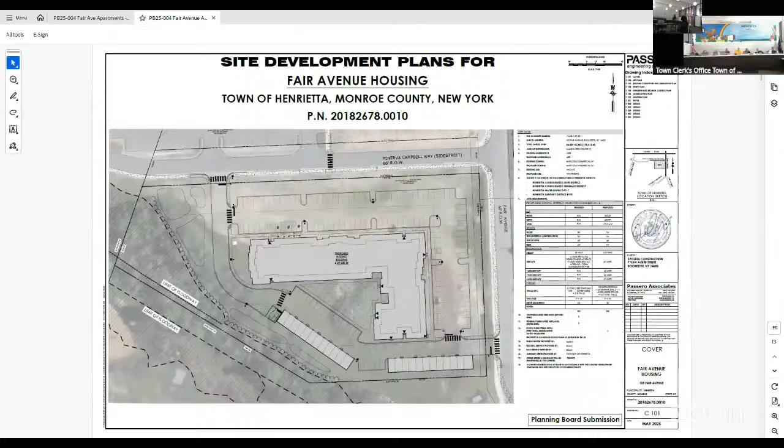One benefit of already having developed this parcel, we already know where a lot of utilities are. Water, sanitary are all in the right of way that we're connecting to. Stormwater on site as well - a very similar approach to what we did for the hotel projects, sticking the stormwater management areas along the west and southern portion of the building. Similar to those developments, it's a combination of bioretention areas to meet stormwater treatment, and then a deep pool to handle the actual quantity of the stormwater on site.

Eventually that all drains to the south and west towards the existing tributary on site. You can see that hatched area with the dashed line is the floodplain on site, so we're not proposing to impede on that at all. Obviously, it's a big point, especially right next to a tributary - we obviously want to avoid any impact to that as well.

As far as other portions of the site, we have a landscaping plan that went through review from the Conservation Board, which was received well. We have this vegetated frontage landscape area that will hopefully, when the trees bloom and get to full vegetation, provide a nice shield from the roads, and then also internal shrubs and grasses to really make the internal pop as well. There were some Conservation Board comments on switching some species out, which we will adhere to based on their comments.

As you stated, we did get comments from engineering staff, the fire marshal, and some other town staff. We went through those comments and supplied responses. No real deal breakers, I guess, just two things I'd want to bring up.

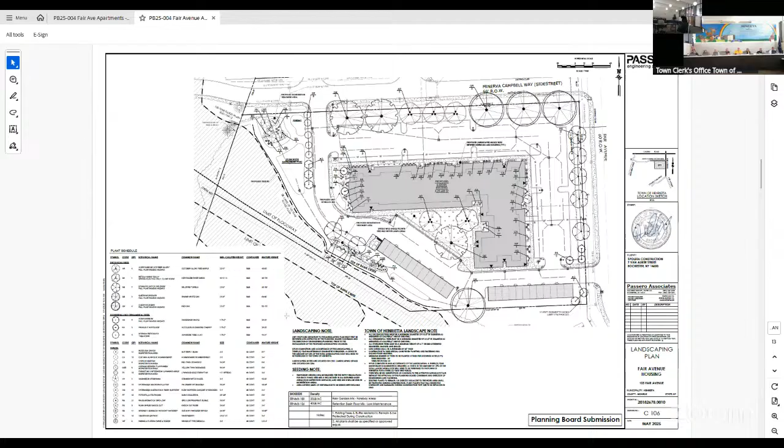What is on their property? The mast arm of the traffic light, the L-shaped mast arm that holds the signals, just where it's located, in the southeastern corner there. It's on their property, so that's kind of a negotiation and discussion with them to get approved. But as far as the design, layout, and everything, it's already been vetted through Monroe County DOT.

I think we'll probably just need one more refresher to make sure everyone's good with it. I know there's been some staff changes, so just making sure everyone's on track and moving that forward. That was a question on the status of that portion of the project, so I wanted to give an update in case anyone had questions.

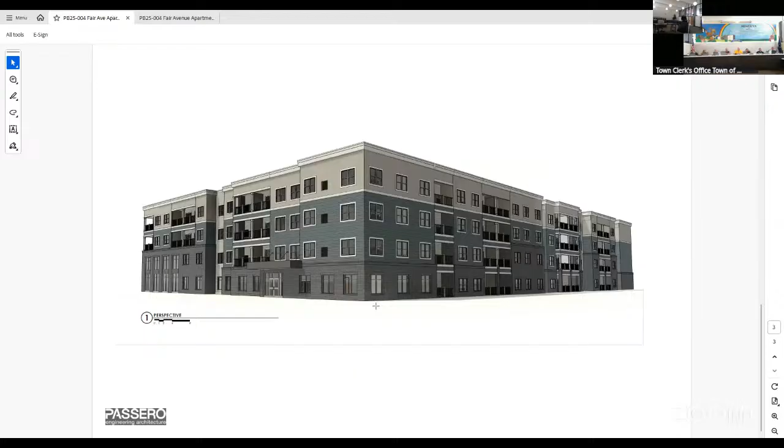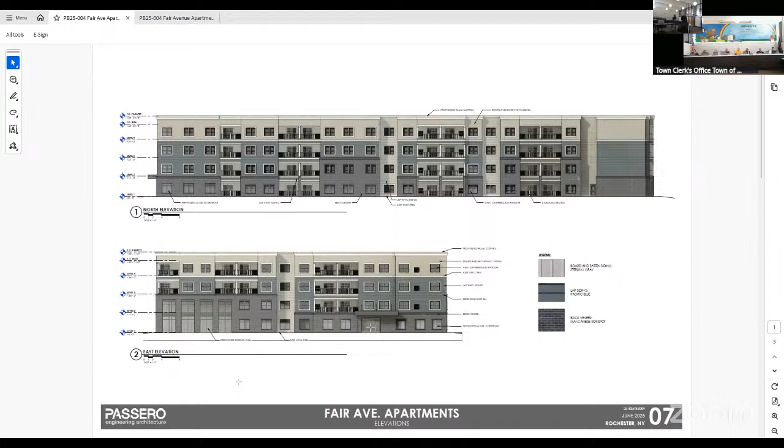That's kind of a fully devoted amenity space right now, internally. Right now it's an indoor basketball court for the residents to use. One of the things with the beauty of this site is it's surrounded by a lot of infrastructure and buildings you can go to.

Obviously you could have maybe a tenth of a mile walk to the rec center, and they have basketball hoops there. You also have the town park around, so we're still figuring out what this amenity space is. We're still working on it, but for now it's an indoor basketball area they can use.

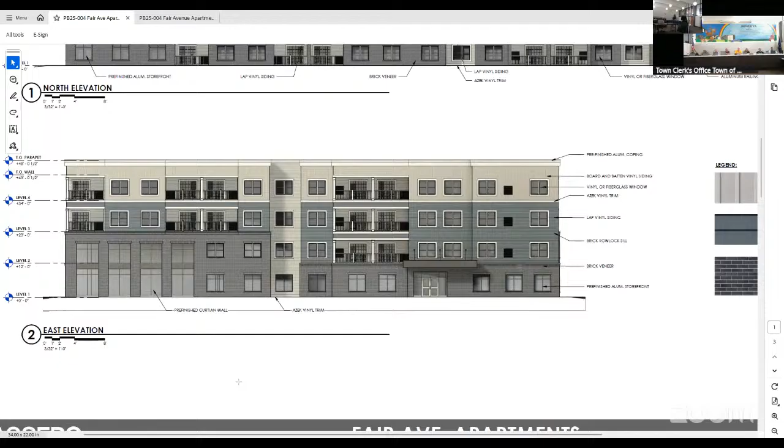It's still being worked out, but it's mainly used to attract a clientele, since you have all these amenity spaces in the apartment as well as the outdoor surrounding area, the library, and Wegmans right across the street. It's a really lucrative and sought-after area to be. To the north there's a bunch of single family homes, and they enjoy that as well. That's kind of the intent, that the tenants here will also get the bounty of this area.

So your target market would be young couples, singles, over 55? What demographic are you really shooting for, do you think? I don't know if you can speak to that, Michael.

Hi, my name is Mike Spoletta. So we have not done a demographic study yet, we haven't gotten that far, but we're finding there's a lot of young RIT students, U of R students, and med students who have been occupying our project in the back.

And that's why we have the basketball court, it's more of a multi-use facility. We're trying to figure out whether we can put a pickleball court inside too. We think we'll have a combination of graduate students and retirees. We've been talking about it quite a bit. That's why we wanted the building to have a little different vibe than the back project, and to stand on its own - it's not going to have a pool. In that triangle area we're talking about possibly doing a fire pit, and this will probably have an indoor theater. We're discussing different amenities, haven't totally pinned those down, but we're looking to be a little different than what's around, hoping it attracts basically all age groups.

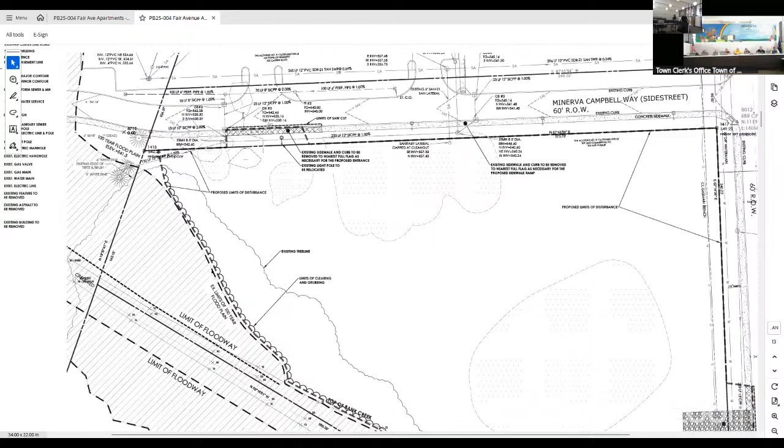And then I think I had the height of the dumpster enclosure as well, but I think that was a comment that you've addressed, raising up that height to eight feet. So going through what I've got, that looks very much like what we had before, what we saw a couple of years ago.

Those are the comments that I had, Mr. Chairman. Mr. Eckert, can I ask you your opinion on the setback? Are you comfortable with the setback? Are we looking at modification one or two? That's what I was also going to see if there was a clarification.

There's a setback to the rear. Is there also one to the front? I don't believe the front requires it. Because it's a corner lot, I wasn't sure on reading through the corner lot scenario if there was something here. On the south side and the back side, I'm very comfortable with that. There's trees, there's vegetation and a swale. There's a good amount of distance between anything else. And if I was going to use that as a reason to grant this, I would be comfortable in that manner.

Okay, thank you. I think it's also from the road to the east too. That's what I was thinking. That's why I wasn't sure because of the corner lot. I think it's both. Yes, but basically, just to kind of - you want to find a microphone, I think, Chris.

Chris Martin, Director of Engineering and Planning - Kevin Wilson and I, with Don's help, sat through this, but it's a very unique lot. Also, with the overlay district, they have certain setback requirements as well, or allowances. So basically, along the east side of the property, which is Fair Avenue, that's a 20-foot setback, and that's per our overlay district.

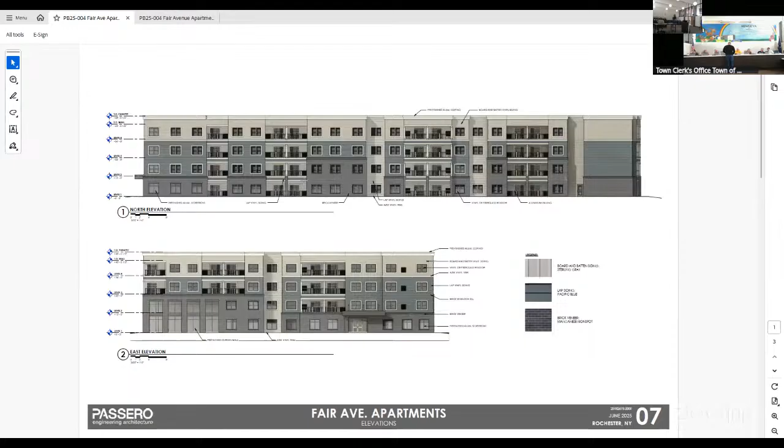These are the different sidings. Okay. Forgive me on this. For me, that would be kind of the elevation. Nice looking building. Yeah, so can we pass it back and forth? I like it. I'll pass it down to you guys.

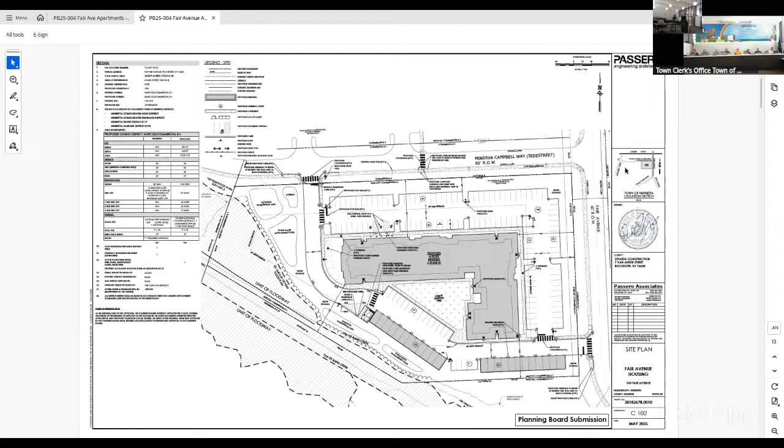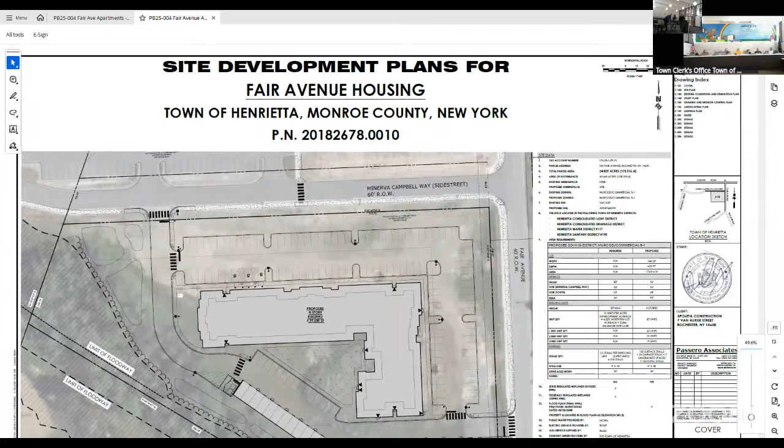Right, yeah, it's not indicated on the site plan, but I think that might be a good idea. There's no sidewalk over there. Yeah, it's only on the western side - there's no sidewalk there? No, and then you'd cross on Calkins. Yeah, it's kind of a dead zone there, right? Yeah, as stated, there's no sidewalk there.

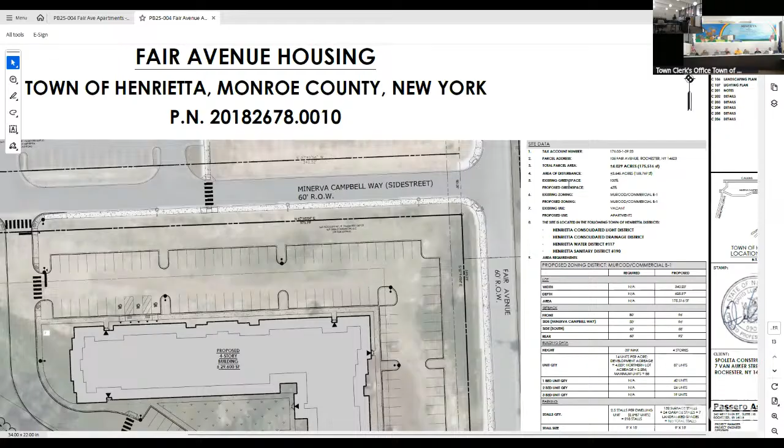As they're leasing, if they take it — we're finding that probably 40 or 50% will take the garages. Right, so it should be pretty close. And it is first come, first serve.

Okay, my other questions have already been addressed. That's all I have, Mr. Chairman. Thank you, Mrs. Reynolds. Mrs. Brill, clarification on that, as far as first come, first serve.

Forgive me, don't go yet. Is it first come, first serve at the time of the lease being signed? Yes. Okay, thank you. At first I thought it was first come, first serve every day, they're gonna be fighting. At the time of the lease signed.

Yeah, we would assign them a unit or garage. Forgive me, that's what I thought, Marcy. Right, so it's just — and I've rented where I had to wait. So if someone rents a unit with a garage and then leaves, is there a waiting list for who's next? Yes, we would take a waiting list and call the next person in line if a garage becomes vacant.

Okay, and is there an additional monthly fee for that? Right now I believe we charge 100 a month. My daughter would know more exactly. That's reasonable.

Do you want to rent a garage, Chris? Yeah, okay. But that's probably less than the storage facilities. It is. Chris is moving too.

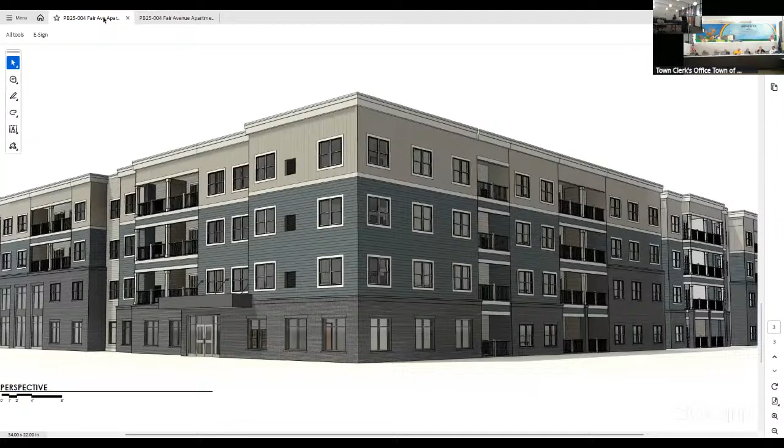So those two things, as I just read, are now in that written resolution you have, if that's the way the board would like to handle it. Okay, well I know Heather had asked me to get a formal vote on discussion items, so I think, can I just take a vote and then we can?

Yeah, I mean, I don't know that this is a discussion item - this is part of the application, and it's right in the resolution. Actually, I discussed it with Heather. You did? Yes. Okay, all right.

Well, very good then. Just as long as, I think what the chairman is aiming for, is that we're all comfortable with the setback. Yes. So basically that you're comfortable with those two garages where they are, is how the resolution looks at it.

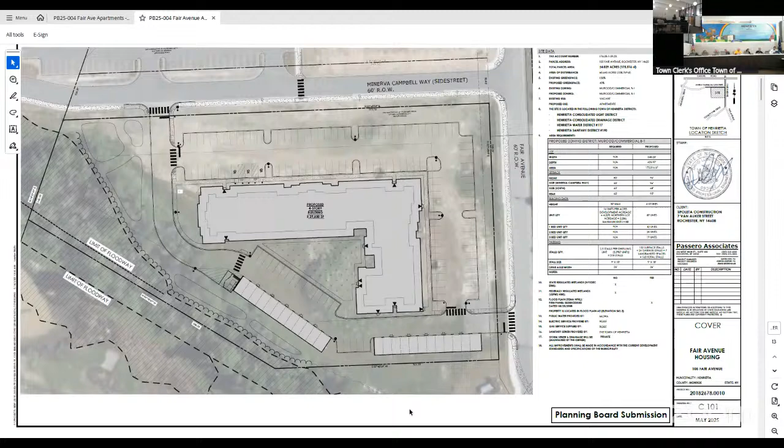All right, fair enough. Thank you, Mr. Bennett. Okay, Mr. Young, anything else, sir, on the application or any other comments from your chair? Beyond what we have already submitted and talked about, if you do move the resolution, I would say move the resolution as written and revised this evening.

Mr. Martin, any final comments from engineering? No, Mr. Chairman, I'm all set. Thank you very much. Okay, discussion amongst the board.

All in favor, say aye. Aye. All opposed, say nay. In the opinion of the chair, the ayes have it, the motion carries. Congratulations, thank you. Congrats, it's gonna be a nice project.

Mr. Chairman, I'm just going to reiterate, my microphone was off, I don't know if my voice was loud enough to hear. I don't want to get corrected by Heather as well, so I'm going to go ahead and again just state that I move to approve the resolution as written and modified by Mr. Young for PB 25, the Fair Avenue Housing Project. Very good, thank you. And we had a 7-0 approval. Thank you, Mr. Eckert, appreciate that.

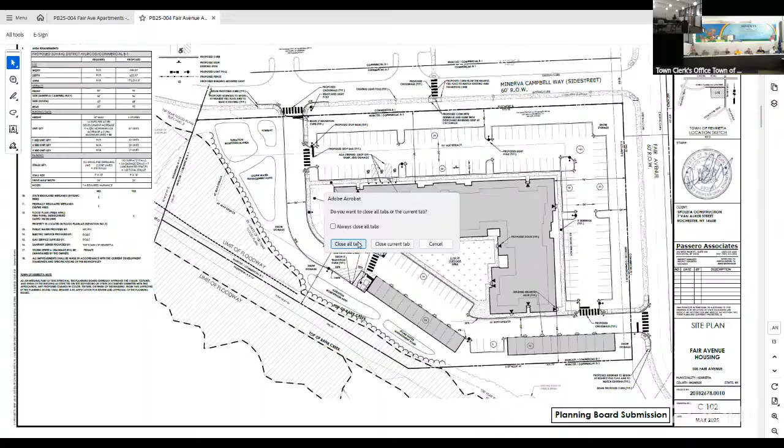Okay, next item, this is a discussion item. Starbucks, the planning board is to discuss approving a 6-month extension for application number 24-006 that was originally approved on June 18th, 2024. The project is to be located at 1100 Jefferson Road in a commercial B1 zone district.

Hello, Joshua. Yeah, I don't know how much discussion on this, but we actually had to get it reapproved at the town board level for the special use permits, since that was expiring. So to avoid that, we put in the extension for this. I believe it's imminent, I believe they're submitting for building permit. I just didn't know the timing, thought maybe it was gonna be before that. It's becoming almost imminent for the building permit, but just to avoid any issues, wanted the extension to get it to that point.

Yep, but they're planning to start very soon on the project. Very good. Okay, well the chair will make a motion to approve the extension to application number 24-006. Second. Thank you, Mr. Borkowski. Discussion? All in favor, say aye. Aye. All opposed, say nay. In the opinion of the chair, the ayes have it. The motion carries. Thank you. Okay, we'll look forward to seeing that started soon.

Can I ask Josh a question, or is it too early? Hey Josh, just a quick question. 1100 Jefferson, is that going to be a new freestanding building? Yes, so it's kind of behind Burger King, in front, I guess technically behind, in the parking lot, yeah, it'll be on the eastern or western side past the Big Lots that's in that plaza. Oh, that's right, I remember we had this one, traffic concern, yes, traffic flow and all that stuff. Thank you so much. Yep, no problem. Okay, Joshua, thank you.